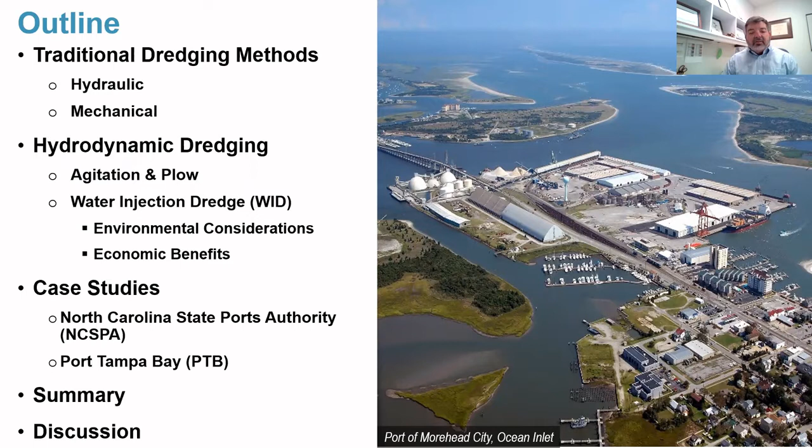One, there is a dredge working in the U.S. that's active. We're going to be doing some monitoring on it coming up here soon. And the other one is one just about to kick off. To summarize things with some data and statistics at that point, and then open up the discussion. And I'm hoping to have plenty of time at the end for discussion. There are several ports we've talked to, different facilities we talked to, and they may be of interest to you, and we'll bring them up as we come.

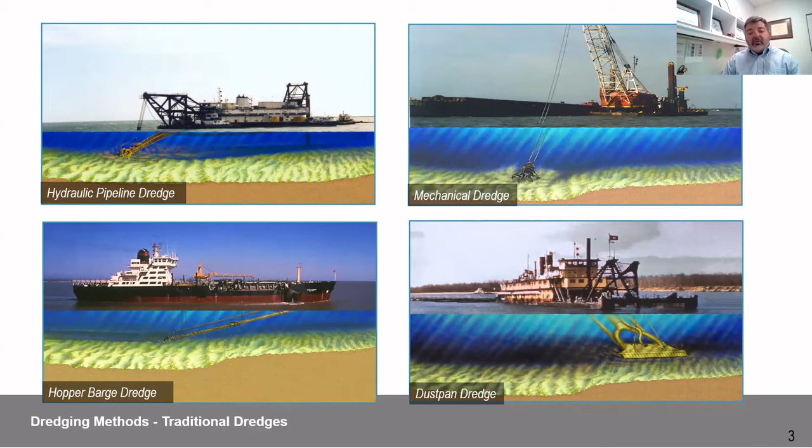So traditional dredging. What you see here are the four most common types of dredges out there. 3 out of the 4 require hydraulic dredging, and hydraulic dredging means that there's a pipeline somehow. That pipeline is entraining the sediment, and that pumped pipeline transport of the slurry is being taken to some kind of disposal location, and there may be multiple booster pumps added to it for the miles that it goes, and so forth. So that's traditional dredging.

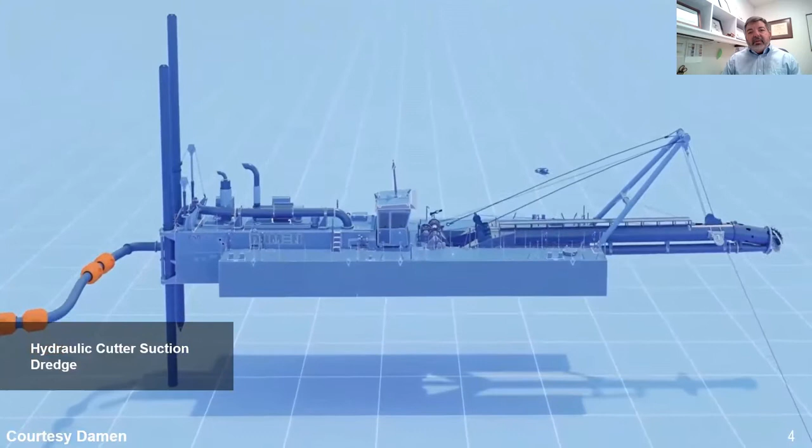An example of a traditional dredge, this is a hydraulic dredge. The right end of the beast you see there is the business end of the beast, and it's coming down to cut into the surface. Of interest, you'll notice that the cutter head doesn't really spin that rapidly. I think a lot of people think it's sort of an egg beater. Material goes through the pipeline, through the pump, and then gets pushed out to a disposal location of some sort.

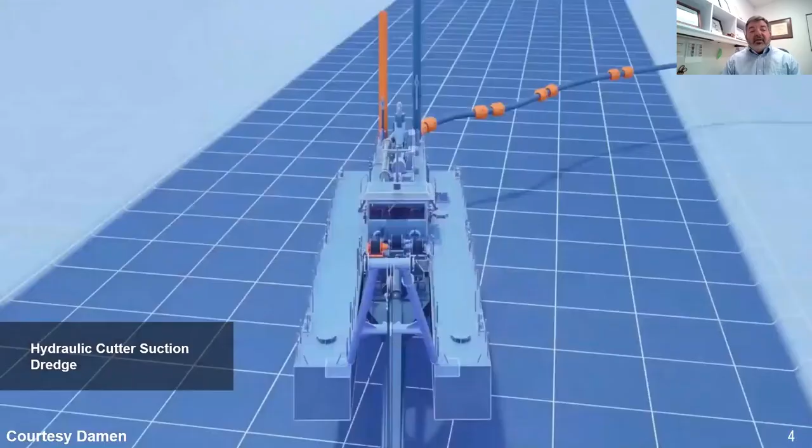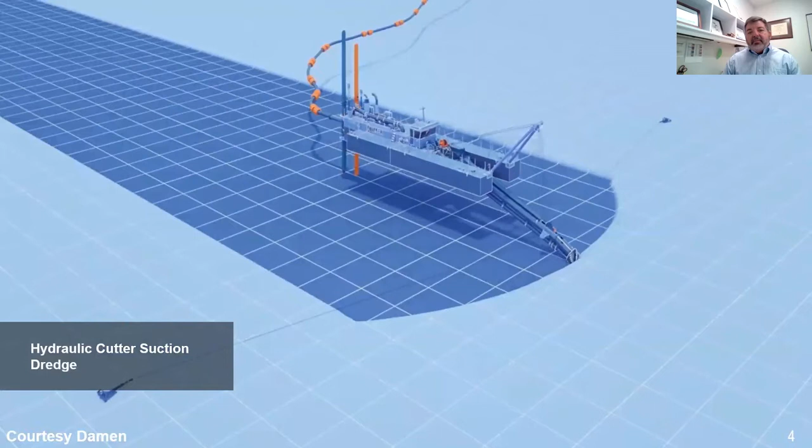Of interest is how these things actually move. Most of them move by anchors and spuds, and they cut in these arcs. I think understanding and appreciating how that actually happens matters. These aren't easy things to work for half of a channel. They're not as easy to work in confined locations because of the way that they do their movement. So that's the hydraulic dredge. And in it, you're pumping 9 to 10 times as much water as you are actual sediment. So it really is about water in this case.

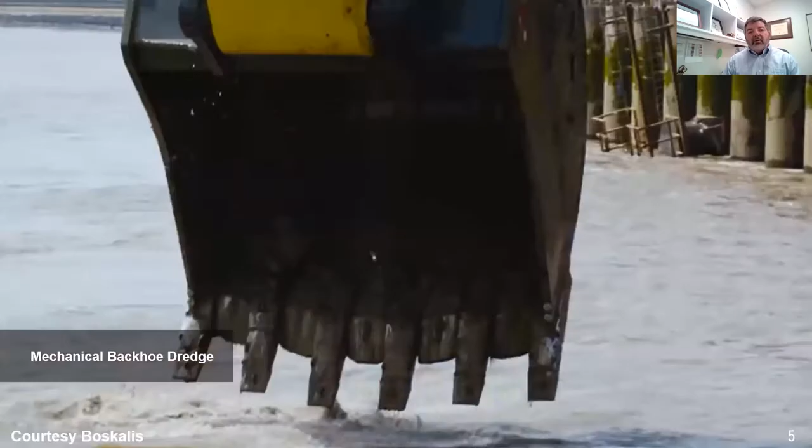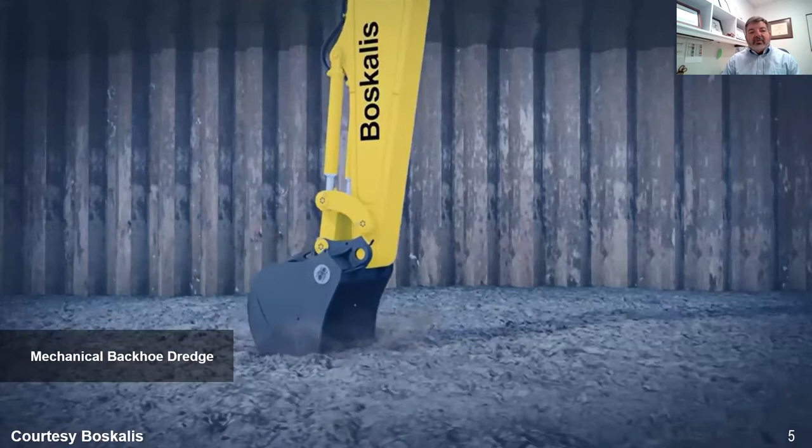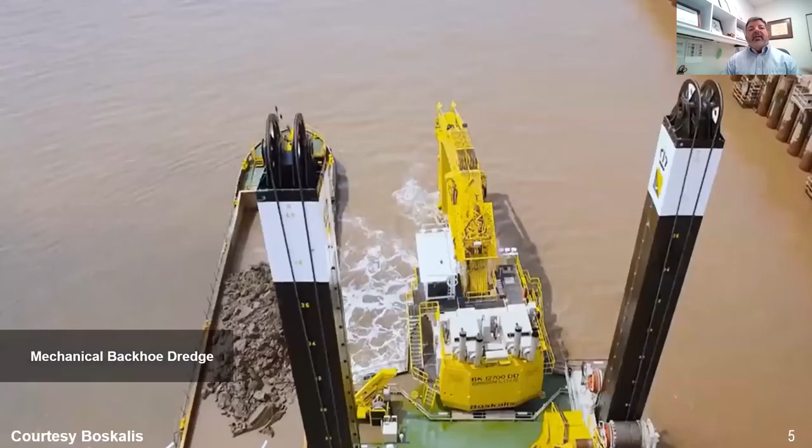In terms of mechanical dredging, well, you're really just talking about the earth moving that people are used to. As you can see, when the dredge head starts in the water, it instantaneously will start some turbidity. And then as it impacts the surface, in general, there's actually even more turbidity than it's being shown here. As it comes up, material is lost at the side, turbid flow happens. So there's a lot of sediment that comes in and out of that bucket that also gets dispersed. And because it's not an earth moving situation, it gets dispersed in the water column.

These also generally move by spuds or anchors. This is a huge system right here. The bucket you were seeing there was roughly 50 cubic yards, which is, I don't know, two dump trucks. It might be a good way of thinking of it. Okay, so that's traditional dredging.

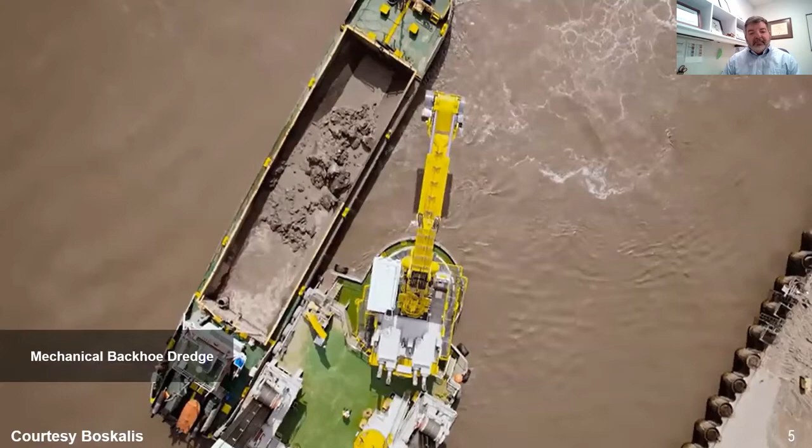Now for something completely different. Hydrodynamic dredging is the least used dredging method in the United States, by far, and it is somewhat used more often in Europe. It's still no more than 10 to 15% of the maintenance dredging in these locations where it's used. But it has its niche.

It's much more environmentally friendly in a lot of ways, and it works with natural systems, which can be a big benefit when we're looking at the dredging techniques out there.

So, divide and conquer. What we talked about originally are hydraulic, mechanical dredges, the traditional dredges, and they're as much about the transport of the sediment through some sort of pipeline, barge, bucket, hopper. Something is happening to move that sediment, and that is a big portion of the cost in a dredging project.

Meanwhile, hydrodynamic dredging is all about material moving through the flow of water. You're not carrying it in a bucket, you're not carrying it in a hopper, there isn't a pipeline involved. It is the free flow of material through this water column.

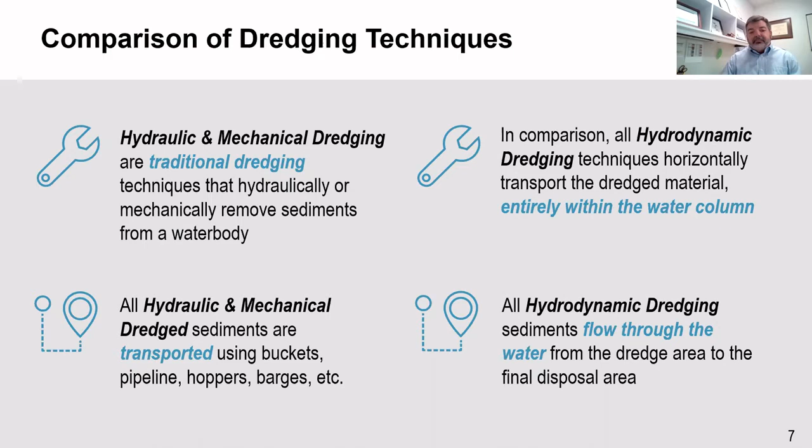So, drilling down a little bit more into hydrodynamic dredges, there's basically two families, two groups. Agitation and plow dredging are kind of the brute force, inelegant, get it done kind of methodology. So the whole water column is going to experience these sediments coming up. The whole water column is going to be part of the action of the movement.

Instead, in contrast, the water injection dredge is creating this density current. And this density current, and we'll show some demonstrations of it coming up, stays close to the bed, doesn't disturb it through the whole water column. We're looking at this dredging technique in a couple of reservoirs for those very purposes, because of the different turbidity function that happens here. So that's the big thing to think about these two families of hydrodynamic dredges.

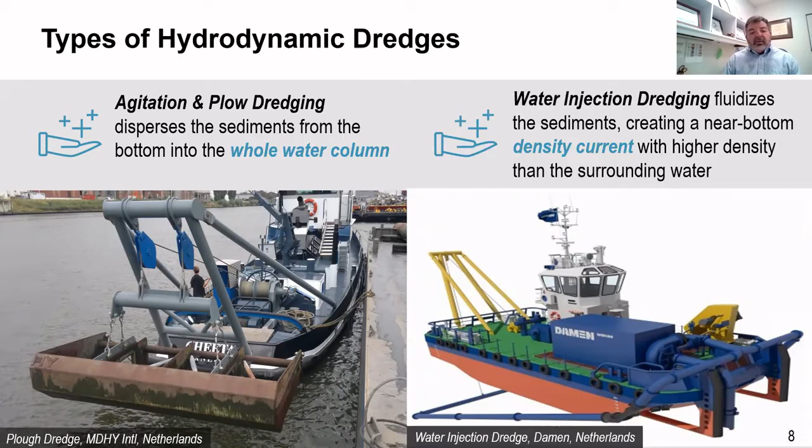So a little bit more on the hydrodynamic agitation and plow dredging. All hydrodynamic dredging requires two things. Something has to bring the material into the water column at some height, some extent. It has to stir the material, has to resuspend the material. It has to, in the water injection case, fluidize the material.

Then you have to have some kind of current force or something that is going to act upon that material and carry it out. And a lot of us just don't think about this. There's a lot of material flowing down any river system, any coastal estuary and bay at all times. And we don't really think about how that could be used to our benefit in terms of these dredging techniques.

So, it's not something that's used a lot in the US. So you think of it sort of as prop wash. A hopper dredge that would fill and overflow used to be a technique that was used pretty often to do this very same thing. Vertical mixers, air bubblers, SEDCON systems. Some port systems have these things they call SEDCON systems, or siltation prevention devices. They fall in this kind of hydrodynamic dredging, agitation and plow category.

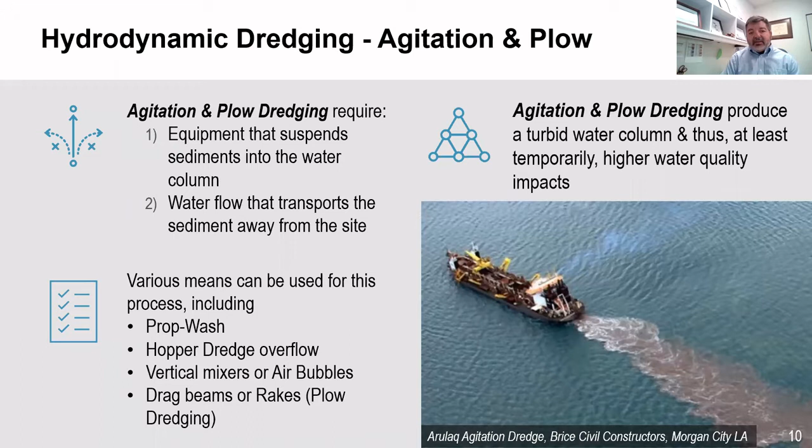And then literally the plows, the rakes, the beams, and so forth. And again, you will see the water resuspend sediments. This is a picture of a dredge right here resuspending some of the sediments by agitation. It is a visible plume. Now, that doesn't mean that this can't be used. It needs to be used in the right circumstances.

But even more importantly, there was a loss of that material in the natural system. And they were finding out that they were basically starving some of their estuaries by taking this material off. Those folks out there who are thinking of how this might fit in the US, Louisiana and the loss of all that marsh out there is kind of a good example of this, that we basically starved a lot of these systems by handling this material and taking it out.

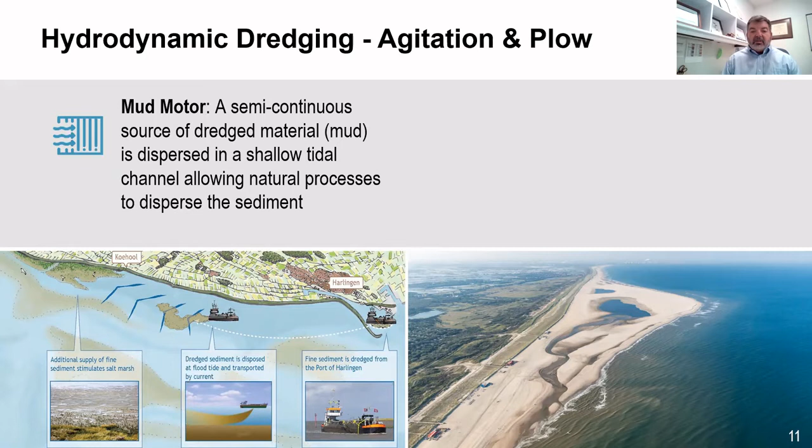So what they do now is they're taking the material out, they're bringing it close to shore where the mudflat areas are reasonably close, and then they're releasing the material to flow in with the tides, basically mimicking the natural process. It's cheaper, they don't have to worry about the location of the material, and they get the added benefits environmentally. Similarly, it can be done with sand.

What you're seeing here with the sand engine, instead of mobilizing 5, 6, 7 times on a large beach project, they berm the material onto what would have been the natural template, and then let natural forces, the agitation, the movement of waves, carry that material in a more natural way. Cheaper again. You're doing less mobilizations, demobilizations. More environmentally friendly. It happens at more of the natural pace.

When you go out there and do a beach renourishment job, right, it's rather intrusive to the natural environment there. So this helps break that down and slow that down.

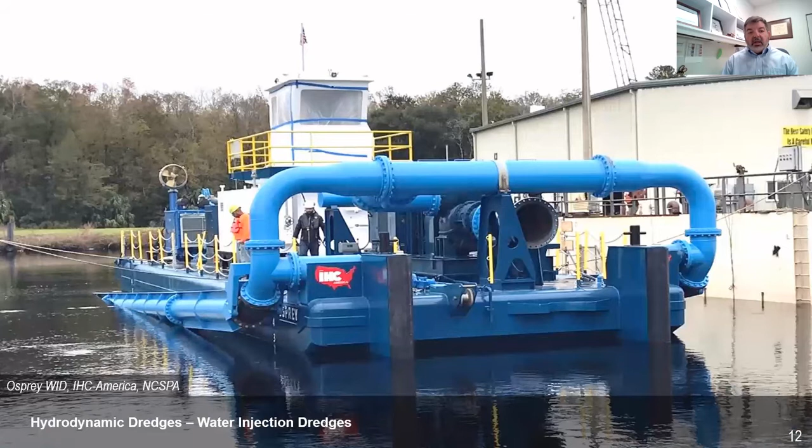So now on to the water injection dredge. And this is the specific dredge we'll be spending most of the time talking about. There are several types of water injection dredges out there, but this is the one that was purpose-built, brought from the Netherlands. IHC is the designer. It was built in the US, and we'll talk about why they have to be built in the US.

Interesting part of the system here, you'll see this open pipe. That's because the pipe is laying down on the side that actually brings the water in. It just barely lays down below the water surface here. You can see that it's very close. It's a very shallow barge. The beam, the reach of the jet bar goes down to 50 feet because that's the depth at which North Carolina works. And we'll talk more specifically about the details of this dredge.

So what do water injection dredges do? You'll see pictures of the nozzles in action and a couple of different examples, but you have to remember that that's happening not at the water surface, but at the bed surface of the river, the reservoir, and the water body. It's not happening above water. It's happening very close to the bottom, and it actually will happen at less pressure than you'll see it when they're demonstrating it. So it's about getting a high volume of water in at low pressure.

And the reason you're doing that, again, is you want to fluidize the sediment. The whole purpose is to make this density current. It's not just to pick up the sediment off the bottom. So once that density current is created, it stays close to the bottom because it has the forces of the water above it, especially when you're dealing with a port like North Carolina, where you're almost at 50-foot depths.

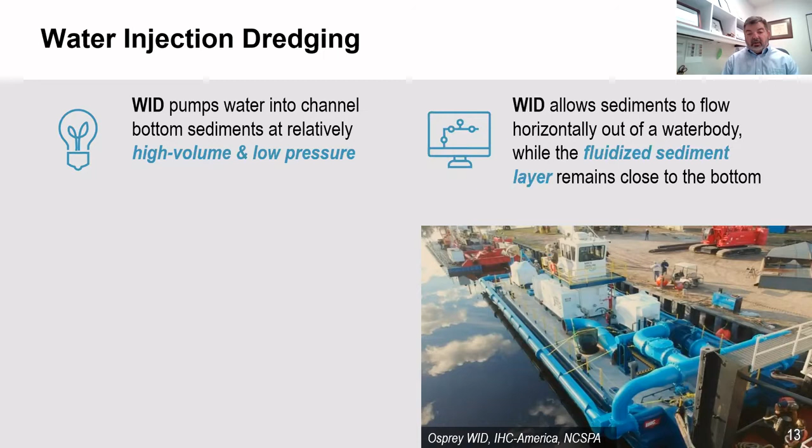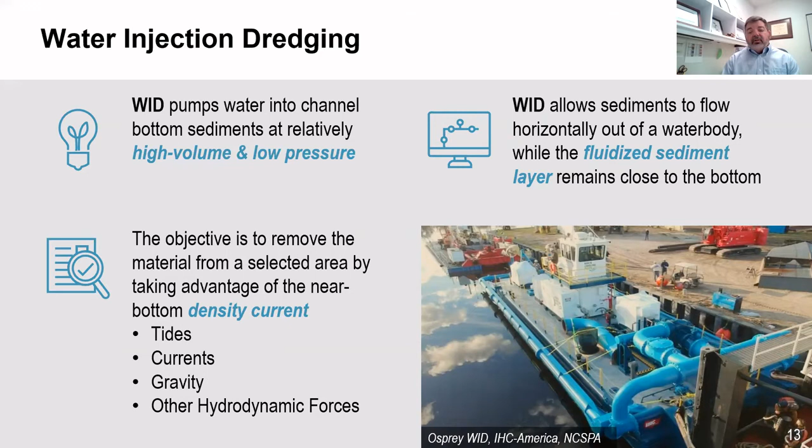So what does that density current need to move it along? Well, it needs either tides, which is what North Carolina is mostly using. Could be currents. There's several ports and systems where the currents are strong and unidirectional, that just getting the material into that current would be very effective. Gravity, when we talked about the reservoirs earlier, gravity might be a key way to get that material to flow through those reservoirs. And then just any other hydrodynamic forces that might happen out there. But it has to be something that's well understood, and we'll be talking about that a lot when we get further in there.

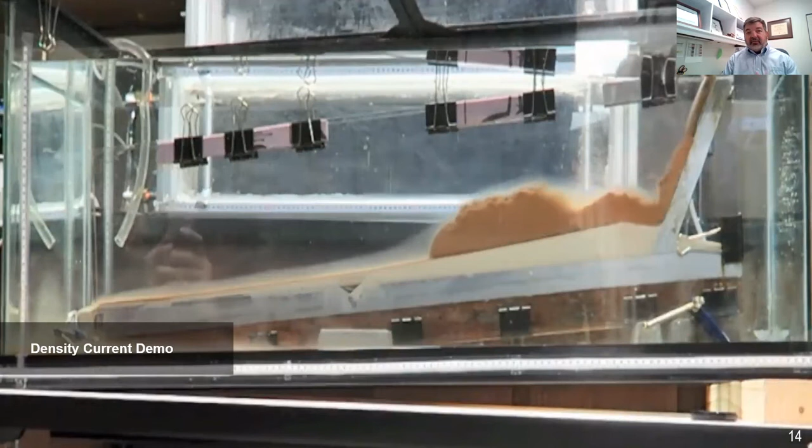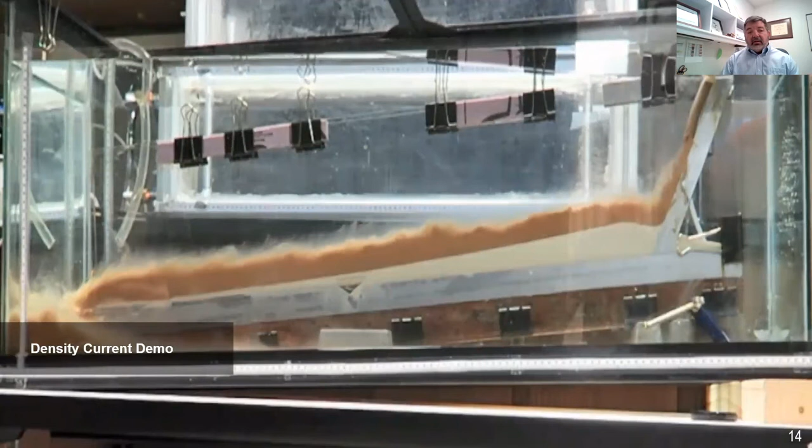So now a demonstration of what a density current looks like. And you have to picture that this is at scale. That would be 50 foot of water. The current height that you would see would normally be, say, 3 feet at the most to 4 feet under this 50 foot of water. So it's a very unobtrusive system that you're seeing happen here. And once the material is in this density current, it will travel a good distance depending on the type of material. So the geotechnical understanding of the material out there is going to be really important.

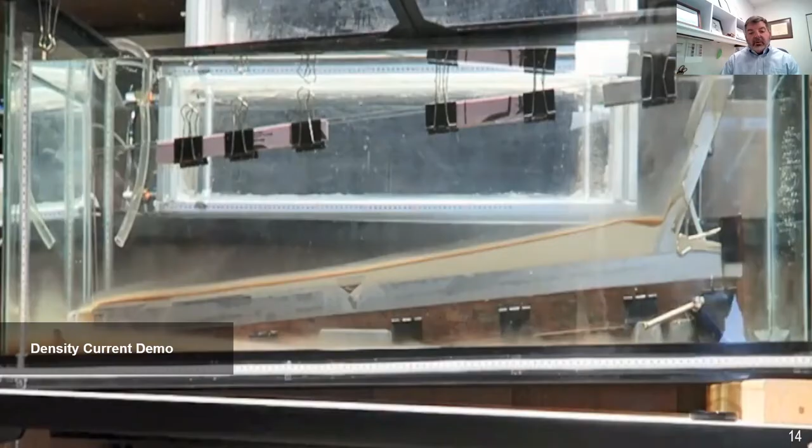The next video is from Van Oord. All the stuff that's around this section of the video is all advertisement for them. So I've cut it down to just really look at the dredge itself. And this also helps because it gives you another view of what another dredge could look like for a water injection dredge. So we'll start the video.

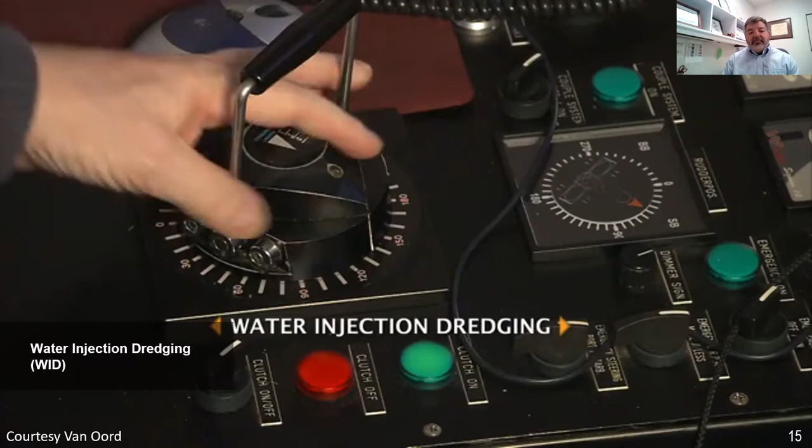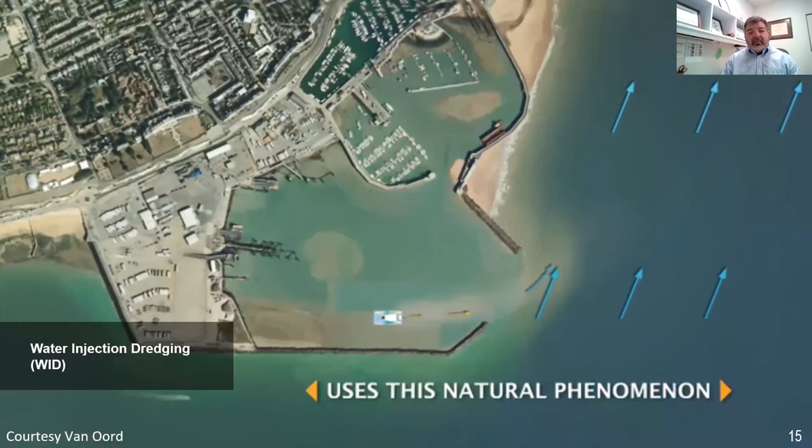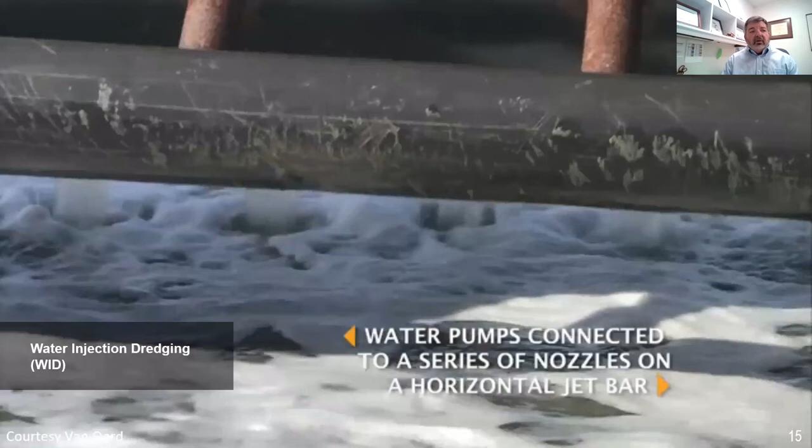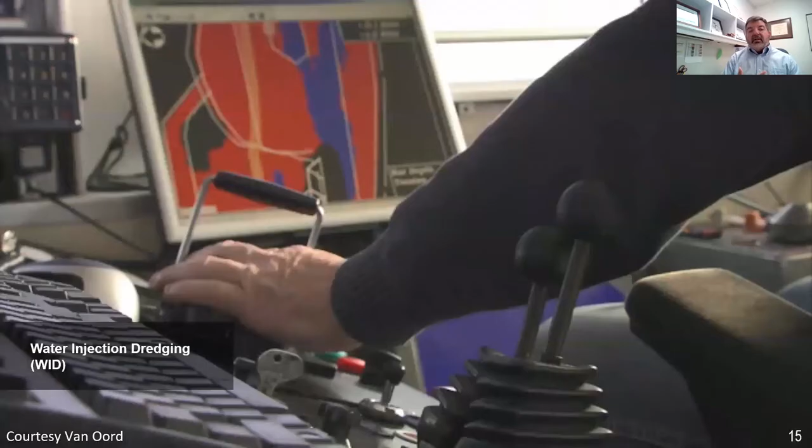Really doesn't take a lot of operation, in terms of crew. It's a singular unit. It pushes out the material like you're seeing here, and there's the unidirectional flow of the current there. Just a second, you'll see the jet bar at the left end there. You'll see them turn it on in a little bit and see the nozzle flow. So that's, again, a lot of volume of water, but not at a high pressure. And you're dealing with only water pumps. You're not dealing with dredge pumps. So these are much simpler systems to maintain.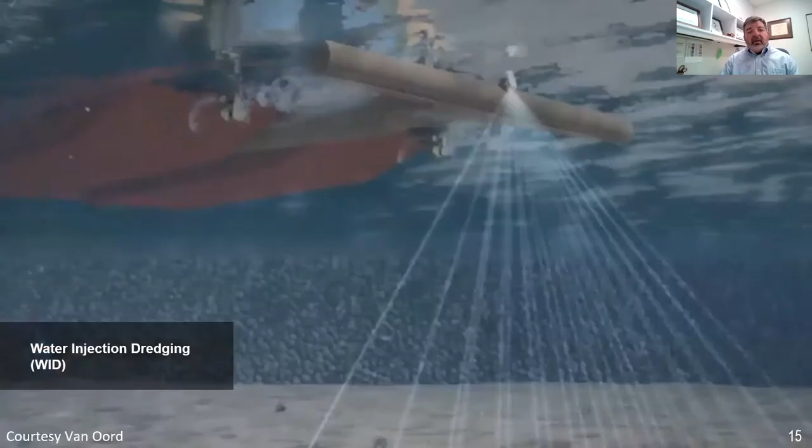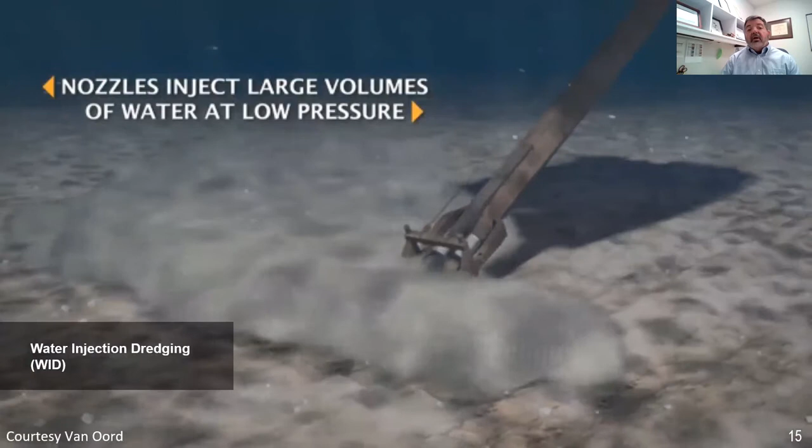In the cab of this system, and this one here is really basically almost an ocean-going capable system. This is quite a bit more industrial than what North Carolina is using. They have the survey. They know exactly where they are. They know how far down to put the nozzle. They know what the cut template is. They know how far they need to go. And really all you have to do is renew that hydrographic survey each time to know when you're coming back to an area and what you need to move the material.

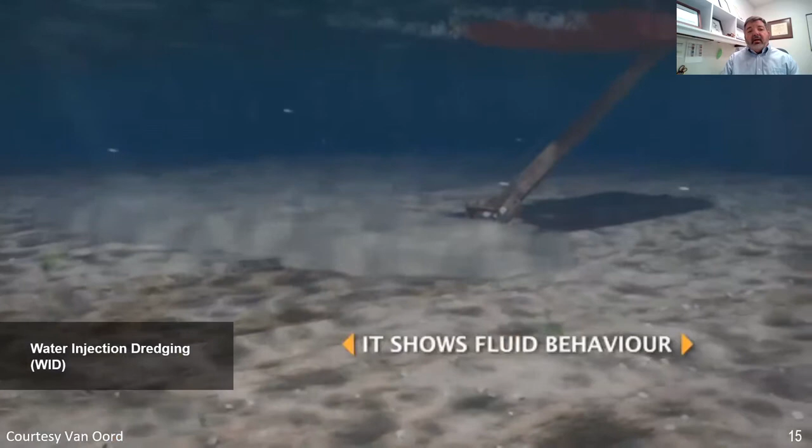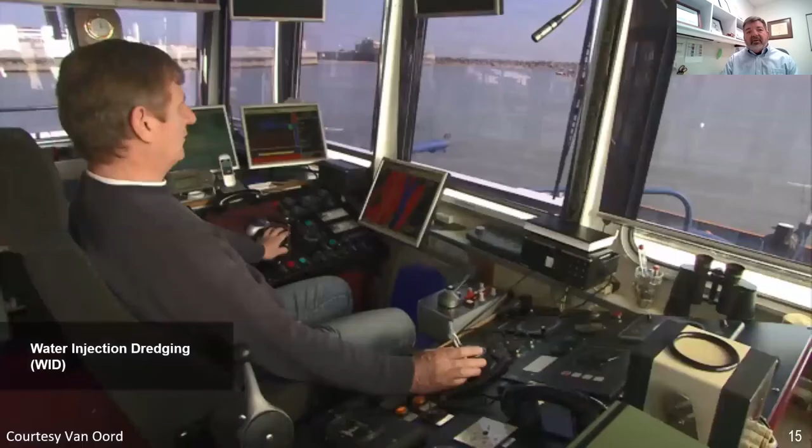So he's creating the current in this case. Current's going to reach this open flow and be dispersed out. You'll notice that he isn't moving very fast. They move basically a knot and a half at the most, which is really tremendous if they're doing that much.

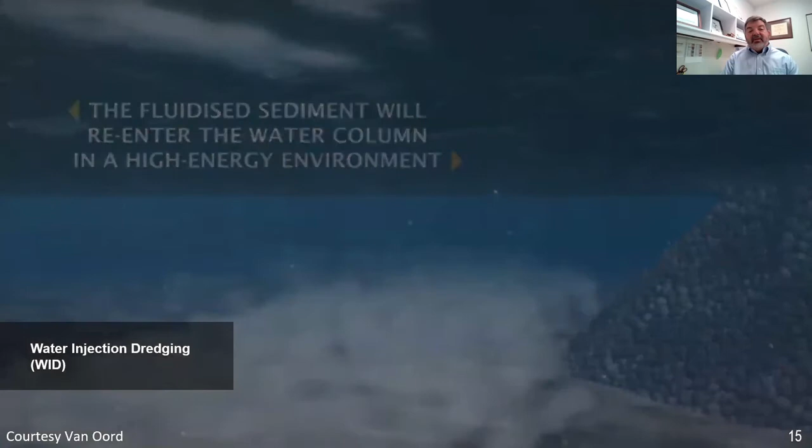That doesn't sound like a lot until you realize there is no dredge out there that's moving a mile in an hour. You don't do it hydraulically, you won't be doing that mechanically. So it is really pretty rapid, but it's just a comparison that you have to think about in terms of other dredging techniques.

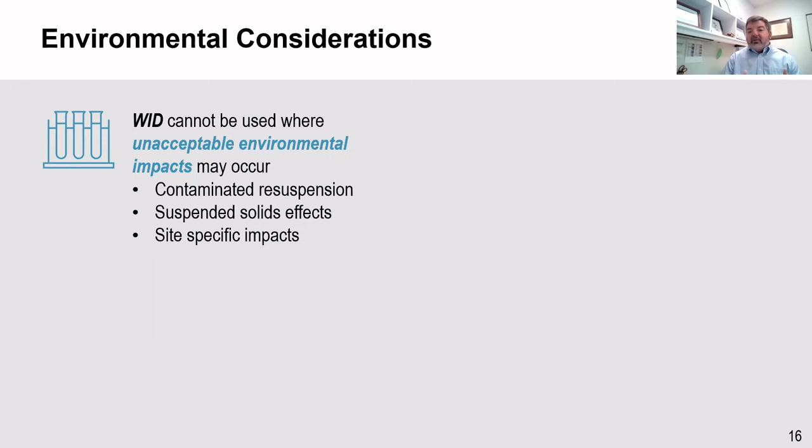So with every dredging technique, there has to be some environmental considerations. Contaminants being resuspended. Using this in the Kalamazoo River is not going to be an efficient and effective way to handle the material in the portions of the Kalamazoo that they're concerned about, for example. Suspended solid effects, if that's a big issue in the waterway, and understanding what that level has to be, that may be something that prohibits this. And just other site-specific impacts. So there are definitely considerations to be made when you're looking at using this dredge.

The biggest thing is to understand the general destination of the dredged sediments. And we'll talk a lot about North Carolina here and what the U.S. Army Corps dredge group is planning to do to help with some of that and their usage coming up in a little bit.

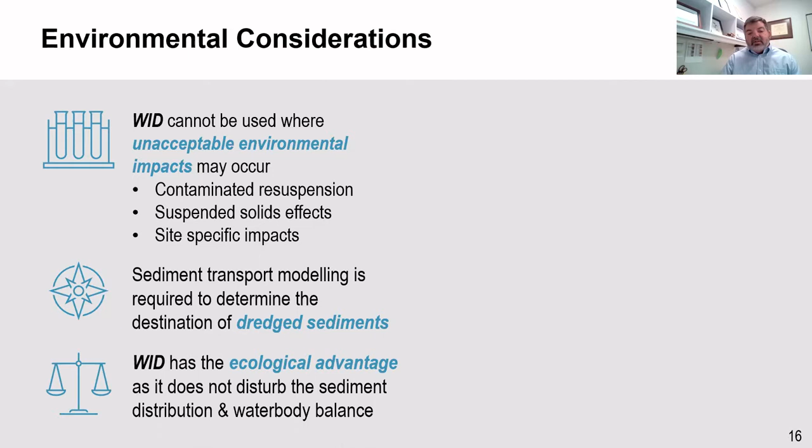One of the things that doesn't get enough mention here is the ecological advantage of using this for sediment distribution within the water body balance. You basically are doing the things that are natural: the storm picking up material and carrying it by, extra high currents, a tidal cycle. You're mimicking all those things, and those are things that the infauna have adapted to and can find a way to react to. So that's one of those things that just doesn't get enough discussion, how this actually mimics a more natural situation.

Again, we talked about the sediments needing to be analyzed and understood. In most cases, people don't realize, but the sediments that are on the bottom of your river and the sediments at the bottom of the port berth are not very much different. And there usually is not a huge constraint on moving maintenance material out of a basin like this.

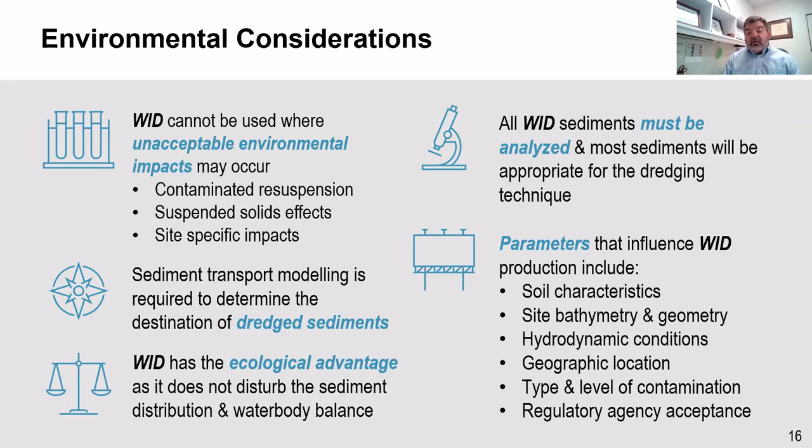So environmentally, there's basically a checklist. We need to do soil characterizations, understand the site bathymetry and geometry. Are we sending the material to a place where it's going to be beneficial? Hydrodynamic conditions, the geographic location that you're working in, type and level of contamination, and then regulatory agency acceptance. And that's key, of course, to any of these kinds of projects.

So let's briefly talk economic benefits. When you're seeing one of those hydraulic dredges out there in the plant, able to reach down and move sediments at 50 feet of water, you're talking a $12, $15 million dredge itself. Then there's the pipelines, the boosters, the disposal locations. There are a lot of pieces to one of those productions.

Instead, with the hydrodynamic dredge, you're buying one unit. The North Carolina dredge was basically a $3 million dredge. You compare that to the cost of the plant for one of these other dredges, and you get a real quick understanding that just the cost of the equipment is a big generator of the difference between these two operations.

Same for disposal areas and storage areas or beneficial use areas. There's a lot of added costs that don't get calibrated, don't get put into the picture of understanding what maintenance dredging costs and what the actual bottom lines are. And they are very expensive. And there's lots of ports out there with a lot of material already in their CDFs, their confined disposal areas, and they're pressed to try to find more capacity, and it's not going to be cheap.

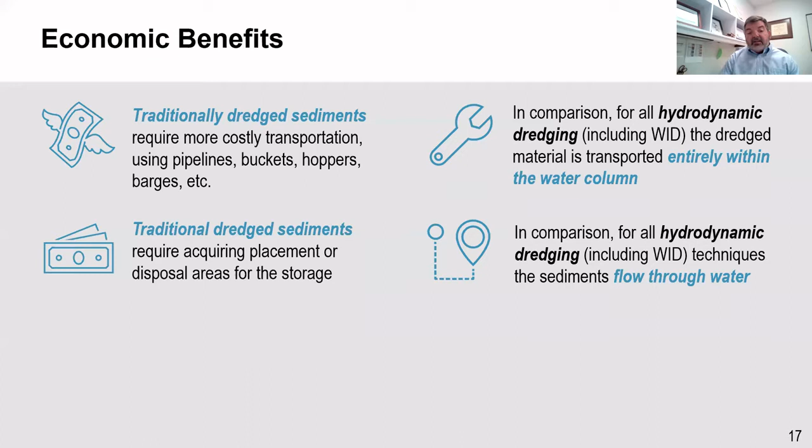So, comparing and contrasting the economic benefits, demobilization is a really good one. North Carolina literally will have the dredge at port. It's there, it's moored. If they need to use it during their environmental window, they can take it out and use it. There isn't bringing a contractor in. There isn't setting up all the pipeline. There isn't all the other things involved in a production for some of these hydraulic or mechanical dredges.

Transportation and storage of material. You don't require these disposal facilities, and we'll talk about them a little bit. A very expensive component of dredging. It's a simple O&M system. The most complicated thing on these are the nozzles, being able to direct them and how to handle flow on those, and we'll talk a little bit about that. And really, it's a water pump.

This is standard type of equipment that's on there. Not the same as a dredge pump that actually entrains the material inside, has great wear and tear and expensive cost for those, and a lower production rate. And we'll talk about that extensively as we go forward.

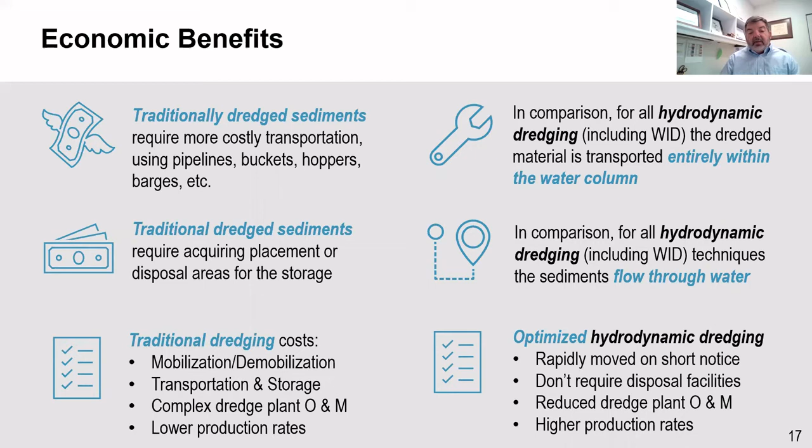So, trying to put all of this into a picture. On the graphs over there on the upper left, what you're seeing is the amount of dredging from 1963 through 2020 US wide, and you can see a decreasing trend in the volume that has been dredged. So all four of those categories are listed, are types of dredging from those years, 63 to 2020. And you can see an overall decrease.

It may feel like we're doing a lot more dredging out there, but in large, we're actually decreasing. And it's roughly decreasing about 4 times the commitment what the Corps had back in the 60s to what they have now. And for industry, it's about a 25% decrease. So overall, we're doing about 70% of the dredging that was done.

At that same slide, if you look at it, same graph, new work has decreased roughly a 1/7. It may feel like we're out there and dredging a lot of new docks with all the deepenings that we're seeing out there in ports and so forth, but in large part that has decreased dramatically. But just to balance that, the amount of maintenance dredging has decreased by 21%. So there's an increase in what is new dredging and what is just being done to maintain things.

Even after, and now looking at the cost slides, even after taking inflation into impact here, if you take and balance these numbers based by inflation criteria from 60 to 2020, the U.S. Corps has almost doubled in the terms of the cost for their dredging. Meanwhile, industry has increased by more than 150% in the overall cost of dredging. So significant increase in the cost of dredging in itself.

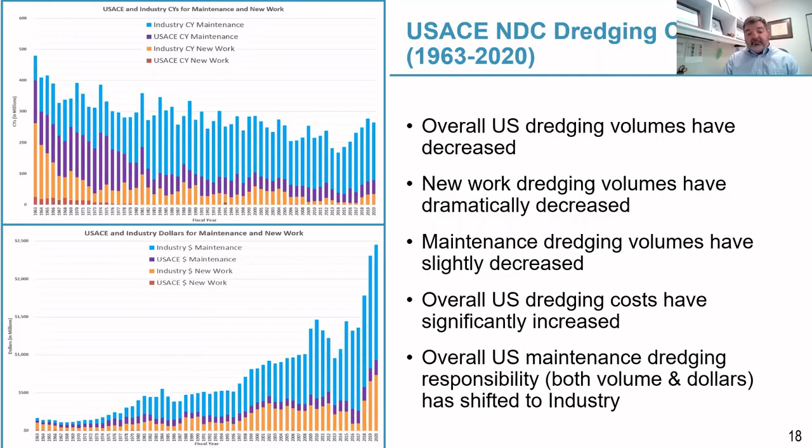All right, so let's look at the case study. Let's look at what North Carolina did. So North Carolina has 2 ports, and that's going to be important because one of the things they want this dredge to be able to do is be able to work at both ports. So they'll analyze both port situations, and they'll analyze also transporting between both ports.

I got involved with them in 2016-ish, roughly, when we were looking at a turning basin deepening project. And at that time, they had already in 10, 15, 20 years of lamenting where are they going to put the next big batch of sediment. They knew they wanted a deepening program to happen. They wanted things to come forward. They were going to have to find a lot of capacity very quickly.

Understanding the situation of the system out there. So as we zoom in, the area that feeds the Cape Fear River, which runs right by the port, is basically about 9,000 square miles. It is heavy siltation river, flows down. There's your main port facility. And when you find one of these main port facilities, you're almost always going to be finding a cell of dredge material next to it.

In that case, it's one stacked basically 45 feet high. They believe they can go as high as 65 feet. The cost to raise these dikes is enormous, let alone all the other things that are involved. And almost any time you look at a slide in North Carolina, you'll find a dredge out there working in the general area. And it makes sense.

As the material is flowing down the river, you suddenly get to this port facility, which is wider and much deeper than the area where the material has been coming. It has suddenly a place to settle out, and there it settles out in front of the port. But not only does it settle out in front of the port and the channel and the turning basins in the center, but it settles out on the edges, which is another encumbrance for a port.

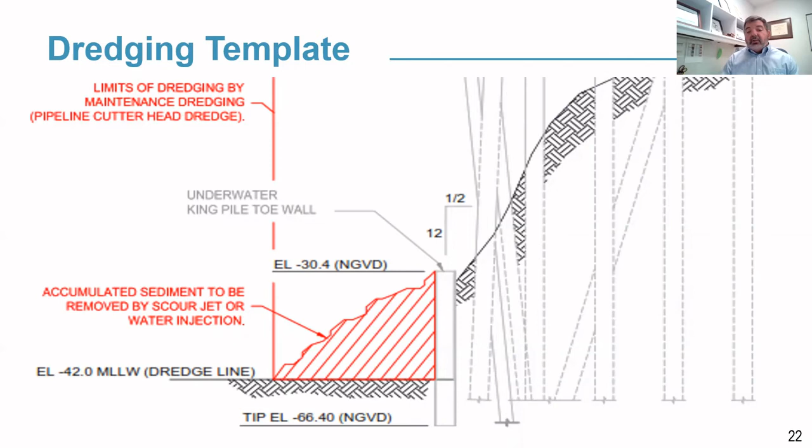So roughly spring of 2018, we got into getting more data for North Carolina, letting them understand what the picture is out there. So we talked to roughly 20 organizations. We talked to everybody I could think of, and I'm sure some of you out there are the people that I contacted. We were trying to get base information on what the water injection market might be out there. Is it a capability? Is it a possibility? Are there contractors interested in doing this just yet, and all that? So there was a big push to give North Carolina some data.

Once that was determined, and we had a group of folks that seemed really interested in bringing this technology to the U.S., we then moved on to the next step. And here's that caution I brought up earlier, the Jones Act. So vessels have to not only be flagged in the U.S., but they have to be built in the U.S. based on the Jones Act. So that was going to be part of the deal here. We weren't going to be able to just go to Europe and, like you buy a crane, bring it over and use it. You're going to have to build this in the U.S.

So there isn't necessarily a contractor set up that wants to do this on their own. There aren't yet dredges available to just buy off the shelf. So the port saw that they were going to very quickly have to do a design build, which they were comfortable with. So a procurement fact sheet was created. We basically said, here are the requirements we're going to need. Here are the general things you'd expect if you're buying any piece of equipment for a port. We're going to expect those things from you, but we're also going to expect some other things because it's the first of its kind. We're going to want a proof of concept.

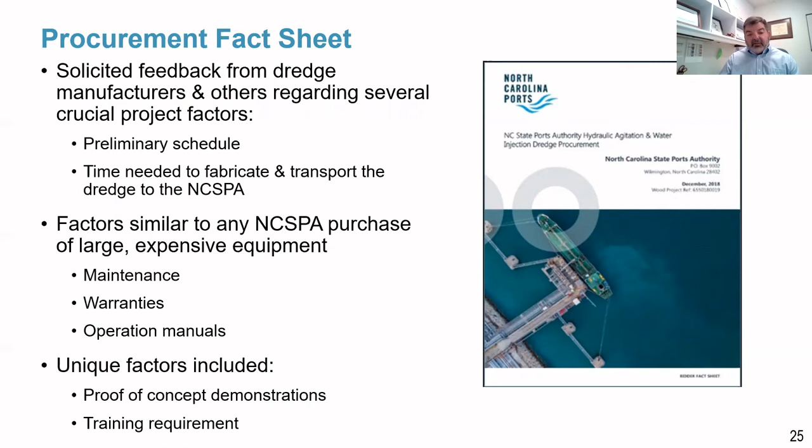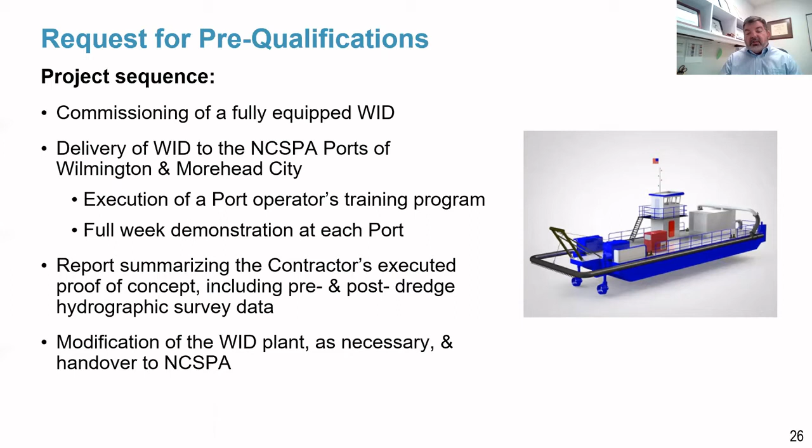So once that happened, they pre-qualified the dredgers, and then they asked at the same time, when they were pre-qualified, to also give in a detailed cost bid. If they didn't reach the pre-qualifications, if they weren't acceptable, they weren't going to open the bid. And because states have to work under different contracting requirements, that allowed them to do that and allowed them to kind of buy an investment in with the contractors. They even at one time proposed possibly putting a stipend in so that they would go a little further in the design, but they felt it wasn't necessary. They were getting enough folks interested and they saw the market, so they didn't do that. But that's another option as well.

So while that whole process was going on, one of the interesting things that happened is the feedback was the geotech you have isn't sufficient. And they had a lot of geotech. They had done a lot of wharf strengthening. They had things from the center of the channel. But all the geotech we normally collect in a port situation is looking for hardness and firmness of materials, talking about blow counts. Well, with the water injection dredge, you need to understand if that sediment will shear.

You need to know, what is the ability for it to split apart and go from a solid mass into a fluid mass, right? So there's a different set of requirements that you want to know and do. So we did a basic geotechnical investigation for that. We did over 25, 30 borings. I can't remember the exact number, but quite a few.

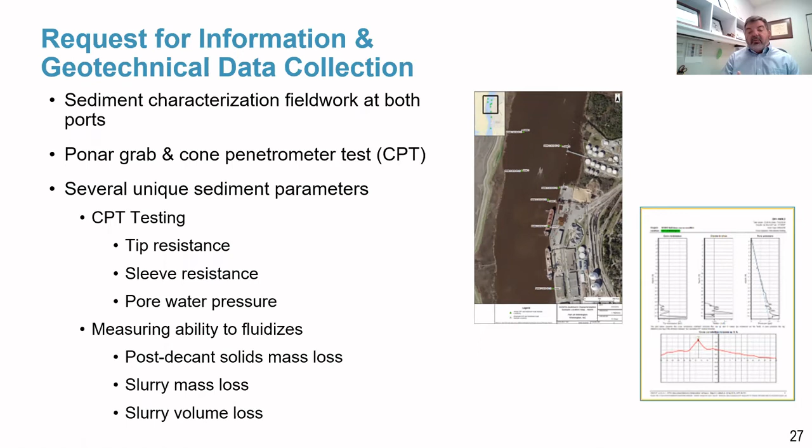Pretty inexpensively. It was $60,000 total for both ports, but it was enough information that the folks designing this could say, okay, yeah, this is the pressures that will work. This is the amount of water we'll need to get in there and agitate the material to cause it to fluidize. So design build RFP goes out.

Technical proposal and the sealed price, as I mentioned before. Each team comes in, does a presentation. There's a matrix, basically evaluate. And interestingly enough, the least cost alternative was not the selected dredge. They looked at everything involved with the whole process. Again, remember, they're buying a partner to help them with the training and that sort of thing.

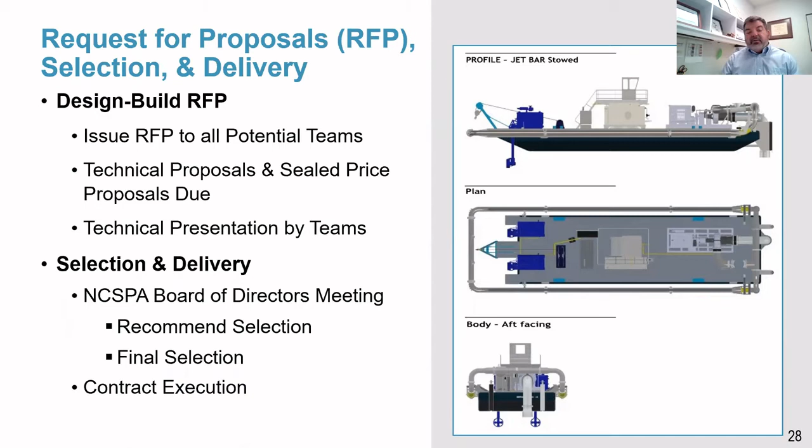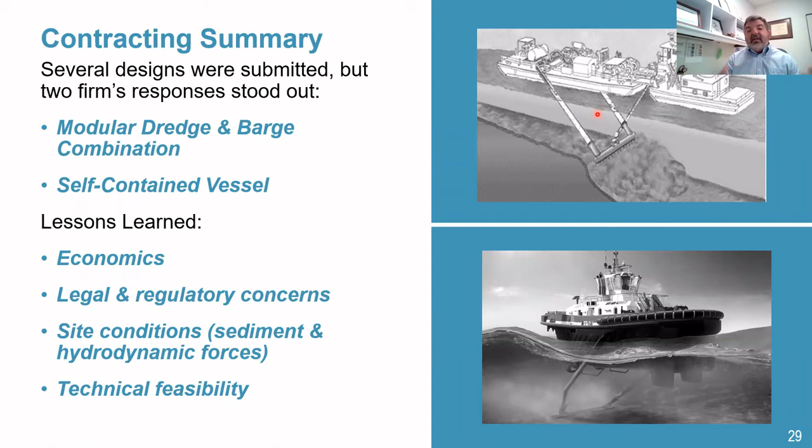This kind of system, and this may be the solution for others, literally the barge could be broken up into pieces and put on container trucks, and you could take it quite a distance, rail or car, any of those were available to you. The port didn't want to be in the process of having to put this thing together back and forth all the time. They felt the wear and tear of that would be disadvantageous to them. They liked the system where it was one unit.

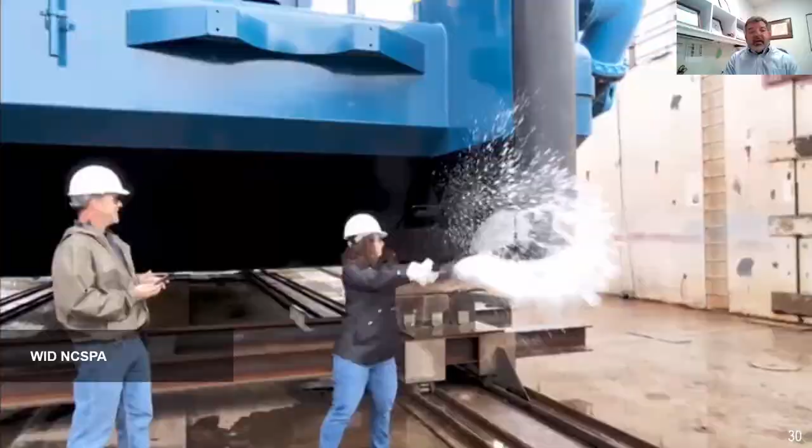So here's the dredge in question. It's called the Osprey. Anybody familiar with Wilmington will know the university there's mascot is the Osprey. That's really where that came from. The obligatory champagne blast. So you're looking at the back end of the system. You see the propulsion, not a heavy duty thing that's necessary. You're really just moving a barge.

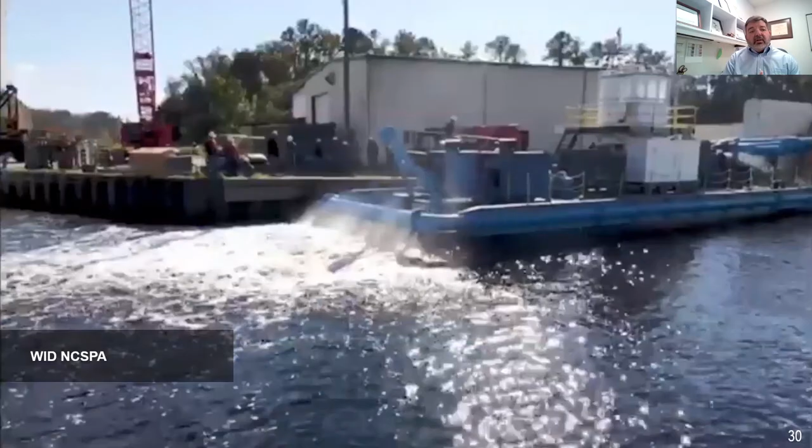You'll see the jet bar down there. You'll see the nozzles, and it's an array of nozzles on the sides as well as in the center. They've got it turned on full blast to demonstrate the nozzles work. They can crank some of them down, some of them up, and when they're using it, they crank the ones up closer to where the berths are, where the material piles up at an angle. So they end up focusing more on that material when they come through.

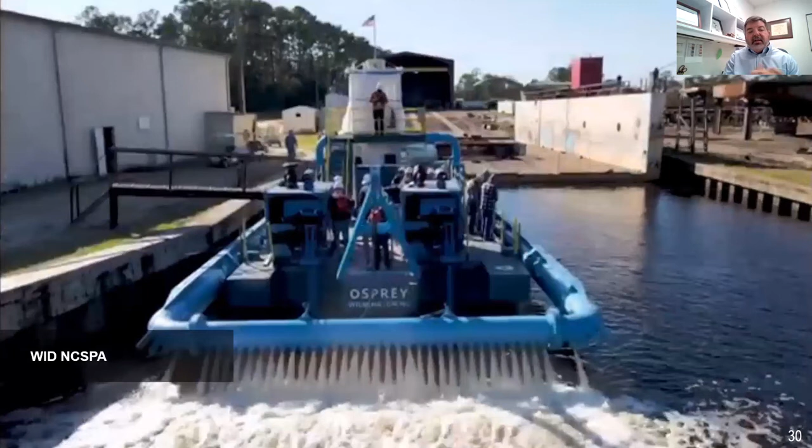And then an overlook of the system. Again, roughly, it was under $3 million for the whole system for the purchase. And then, because this is a shipyard's video, we zoom out to see a pretty picture of the shipyard. Move on from there.

So they use that dredge. This is all happening during the pandemic COVID situation. They used that dredge last year during their window. They have an environmental window where they're allowed to use the dredge, and other times they're not. And I'd be glad to discuss that if it's a question people are interested in.

And unfortunately, they had planned to do that with monitoring by the U.S. Army Corps, ERDC division, but that did not happen. But it is planned to happen this January. So the U.S. Army Corps at ERDC, they've created the plan already. It's funded. They're planning to be out there in January. The first thing they're going to do is compare pre and post dredging hydrographic surveys, not just at the site, but further down the stream, and see where the material goes and how they can account for it.

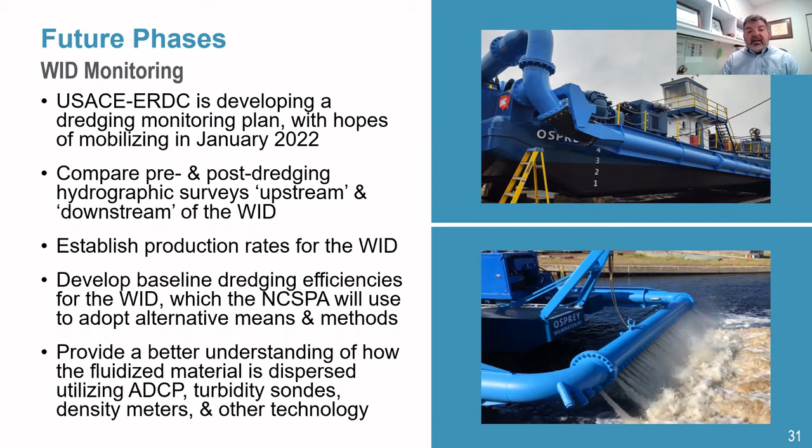So now the second case study I wanted to jump into in some detail, but like I said, I'd be glad to talk about any of the other case studies or any of the other information, or just any general site. And that's the Port of Tampa Bay. Port of Tampa Bay is one of the largest container and cruise terminals in the U.S., and I think a lot of you are very familiar with it. It is an immense system.

There are roughly 10 miles of channel outside of the estuary, and if you're going to try to find the ODMDS disposal area, you'd have to go off this picture another 9 miles. So just taking materials to an ODMDS takes them 20 miles one way, 40-mile round trip. And that's very expensive, obviously, in these kinds of conditions.

Also, one of the interesting things about Tampa is each and every one of their main stem channels really are fed by stormwater. They all come into a city system where it is basically the outfall of the city stormwater on the way into the basin. So they are dealing with that water, those sediments, those criteria, as much as they do with what's happening within the ocean, the estuarine system.

Another thing that's interesting to see in this picture: these are their confined disposal areas, their main two, and they do also have some upstream here as well. And that's MacDill Air Force Base, just to give you an idea of how huge these CDFs are. That is one of the largest Air Force bases in the U.S. on the East Coast. So you're spending a lot of money, you're creating a lot of this material piled up, and it really does come into account.

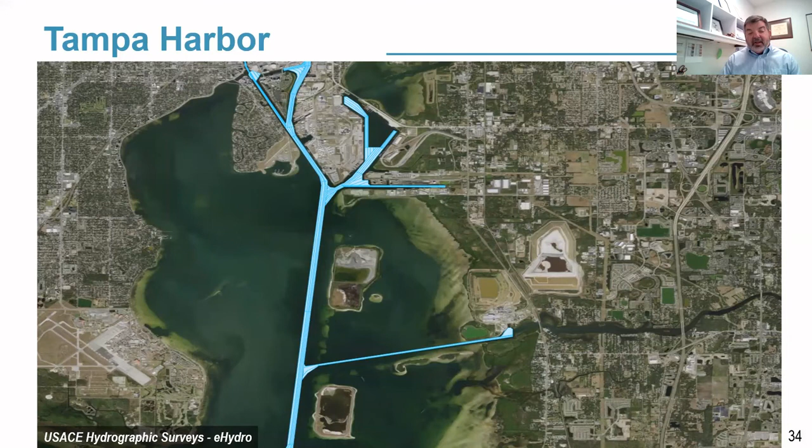The next thing, besides looking at the surveys and where the channels are and how they are configured, that's kind of the geometry of things and partially the hydrodynamics. We also want to look at what their dredged material management plan was for the port. What are they doing now? What systems do they feel are efficient and which ones don't?

At the time of this report in 2011, they were basically going to be out of capacity before now, right? They're looking at roughly 1 million cubic yards of maintenance dredging per year, and they had about 7.5 million cubic yards of capacity.

They tried to look at using more of the ODMDS for disposal, and it just really is very cost prohibitive given the distance it is offshore. But it was one of the things they put into the list, and tried to do more beneficial reuses and reducing dredging needs. But the last one's a great one. So if there's some way to keep the material from ever having to be deposited in a berth or in a channel, to keep it moving through the system in a natural way, you could possibly accomplish that last one.

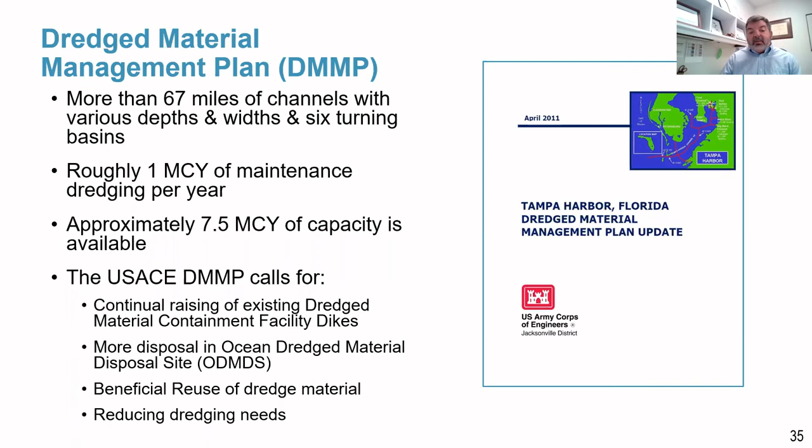So our scope of work with them, it is an active scope. We're looking to get the green light here, the NTP here pretty quickly. We're going to look at their entire budget. We're going to look at their federal responsibilities. We're going to look at the structures that they have out there and new infrastructure they might undertake. We're going to look at their dredging methodologies.

So where the water injection dredge may be used near the berths to remove this light material that fits the geotech example of what you expect for a water injection dredge, there may be another use out here in this channel that is totally different than what you would have imagined. This area that you're seeing here in the swash zone, there is a lot of material that is sandier, not 100% sand, but fine sands to some silts and clays that builds up your prototypical channel waves, where the material kind of falls into a crest trough throughout the channel, mimicking what a beach template looks like.

What they do currently is they come out with a mechanical dredge, go to the crest of those areas where the shoaling is the greatest, scoop up the material, turn the mechanical dredge 180 degrees, and then drop the material outside. So they're just side casting it. Well, not surprisingly, some of that material is going to find its way back into the trough and keep feeding the system. It's a recurring, ongoing burden that they're taking on by just moving the material that short of a distance. And really, environmentally, is it better to do that?

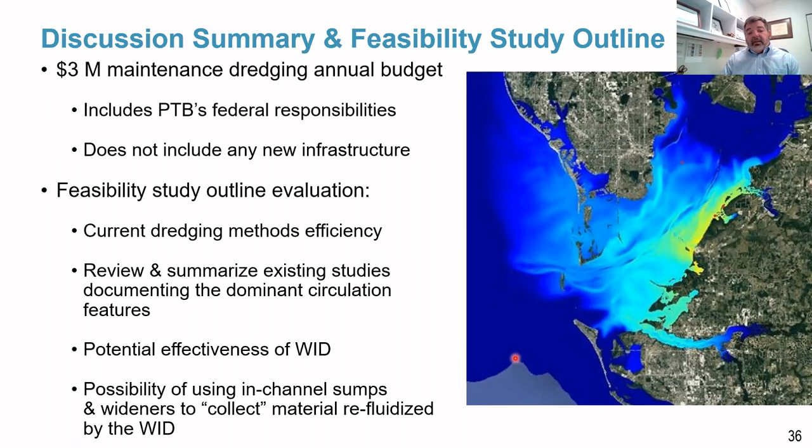So we're really interested in getting out here and kicking the tires on this system and seeing where we can help the port get more efficient. So places where water injection dredges become a conversation, there are actually things going on there. I have this slide in twice, but that's good.

So there is an active dredge in North Carolina. There is a scope to look at the dredging at Tampa. We mentioned Kansas. Kansas Water Office is very much interested in looking at these systems in reservoirs. Talked to the Georgia Port Authority. We've talked to the South Carolina Port Authority, talked to Maryland Port Authority, and have a conversation later this week with the Alabama State Port Authority. So we've had quite a few folks that we brought this information to.

And now the final summary, and then I'll open it up for discussion. Like I said, we could talk about some of those areas that we just listed. Let me put them back up there. If any of those are specifically of interest to you, we are engaging with those folks and looking at ways we might be helpful to them.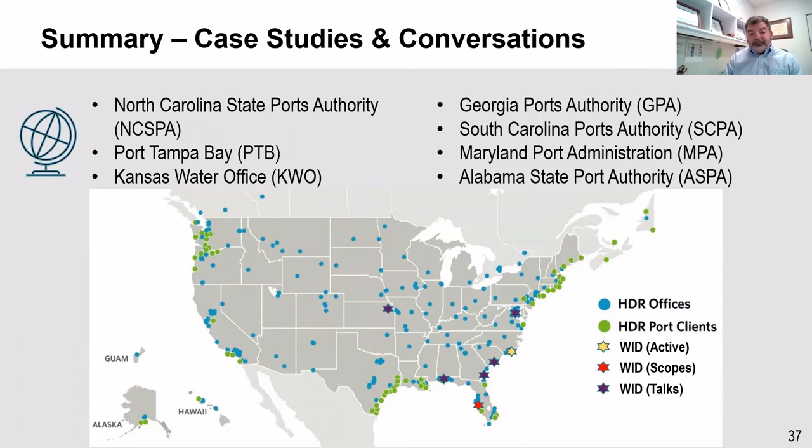So the takeaways. The key benefit of a water injection dredge is the fact that you're transporting this material through the water column. All that entails has to be understood, has to be described in full, but that is a huge benefit. And the ability to move material through the water is obviously less expensive. We just need to be very efficient at it, and there are things we'd have to do for that.

It's a rapidly evolving field. The concept of water injection dredging is probably 20, 25 years old, when it really got used in Europe for the first time. And there are a lot of things, like we mentioned, the reservoir dredging. That's always been out there. People have always wanted to try that. It has never gotten to the point that it's been used either internationally or within the US.

Traditional dredging is often about moving and handling water. And I think a lot of folks don't think about that portion of it. Even if you bring it to one of these confined disposal areas, the water then exits that disposal area through decanting and through a weir system. So you're cycling that material. If you're concerned about something, you're cycling it through all this water, taking it to a settling basin, and then releasing that water again. So that whole thought needs to be put in when you're comparing and contrasting these techniques. Understanding those water impacts really needs to be looked at.

Site conditions, sediment, hydrodynamic forces, you need to know them very well. You need to make sure that you're feeding the system at the right time. You feed it at the wrong time, it's going to do the opposite of what you want. Technically feasible. And we've demonstrated that with North Carolina. We believe we'll be able to demonstrate it in a lot of other ways. This is a very feasible alternative out there.

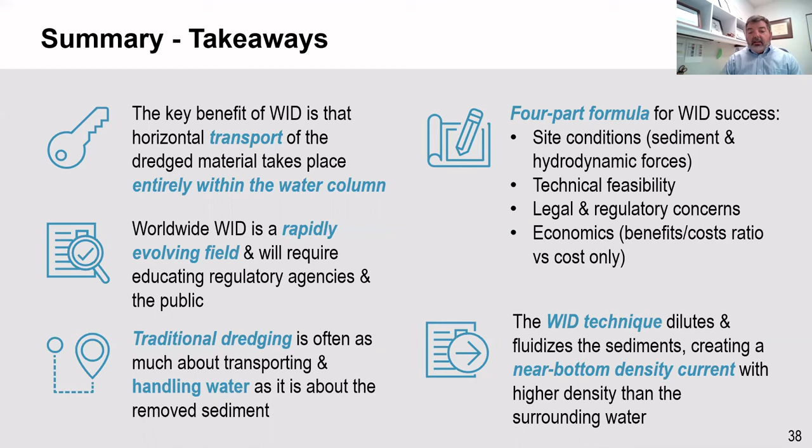And then the economics. We briefly showed that chart. Remember all those costs that I presented to you? Well, that's all the cost of just moving the sediment. That isn't the cost to build the next CDF. That isn't the cost to permit the offshore disposal. That isn't all these ancillary costs. If we really put the dollar amount that traditional dredging methods require into the picture, a lot of these innovative techniques should be looked at carefully. And there are dollars to do it, because you have such a difference in cost. And with that, I'll finish and open up questions.